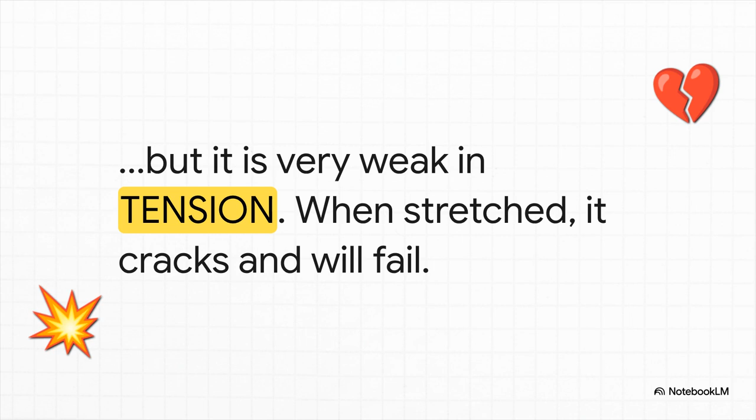That's its strength. But every superhero has a weakness. And for concrete, it's tension. It is just terrible in tension. If you try to pull that same block apart, it'll just snap. So think about a simple beam. When you put a load on it, the top gets squeezed, that's compression, it's happy, but the bottom half gets stretched apart. And that stretching force, that's tension. And that's where unreinforced concrete fails every single time. It cracks from the bottom up. So how do we fix this fundamental flaw?

Well, that brings us right into Section 2, conventional reinforcement. This is the classic solution, and it's a concept you absolutely have to master for your Level I exam. The fix is actually pretty brilliant in its simplicity. We just put steel bars, rebar, right in the areas where that tension is going to happen. For a simple beam, that's usually the bottom. The wet concrete flows around the rebar and hardens, creating this incredible bond. So now when that beam is loaded, the concrete basically hands off those stretching forces to the steel. And steel loves tension. It holds the whole thing together.

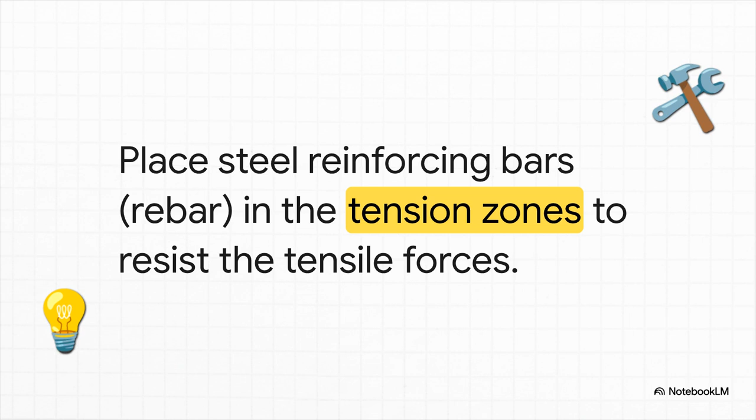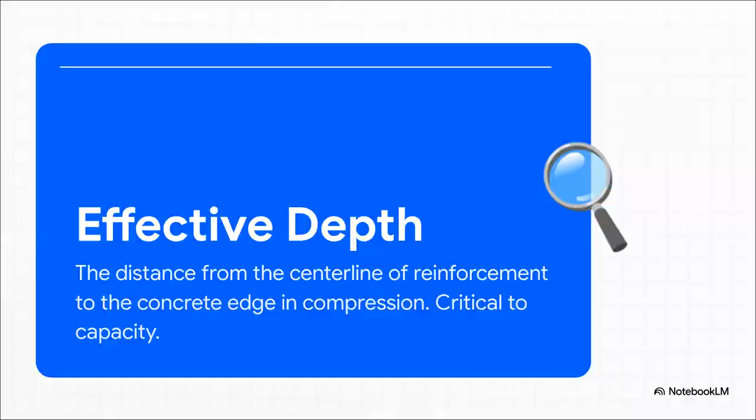Now, here is a term you absolutely positively must know for your exam. Write this down. Effective depth. It's the measurement from the dead center of the rebar all the way to the top edge of the concrete. Why is this so important for you, the inspector? Because this one little dimension has a massive, massive impact on how strong that beam is. If the rebar is placed just a little too high or a little too low, you've changed the effective depth and you could be seriously compromising the member's capacity. It's a huge deal.

Okay, let's get specific about your exam. For all you Level I folks, you need to nail the basics. Why do we need reinforcement? How does regular rebar work? And the hands-on stuff, like checking bar sizes and making sure they're in the right spot according to the drawings. Now, for Level 2, you need all of that, plus the advanced topics you see on the right. Things like pre-stressing, running some basic elongation calculations, and understanding how strands are tensioned.

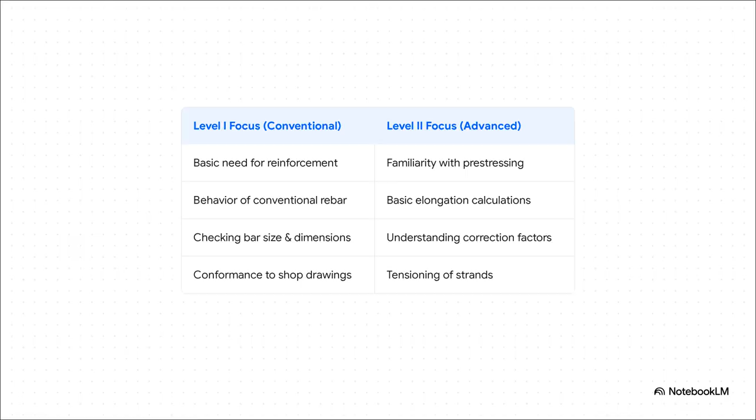Now, conventional rebar is great, but it has one little catch. The concrete actually has to start cracking a tiny bit before the steel really starts doing its job. That brings us to the next level, the power of pre-stressing. This is the proactive approach, and it's a core topic for all you Level 2 candidates. The easiest way to think about this is passive versus active.

Conventional rebar is passive. It just sits there, kind of waiting for a problem, a crack, before it jumps into action. Pre-stressing, on the other hand, is active. It's a preemptive strike. We stretch high-strength steel strands and put the concrete into compression before it ever sees a load. So it's already squeezed together, actively fighting against the tension that's coming later.

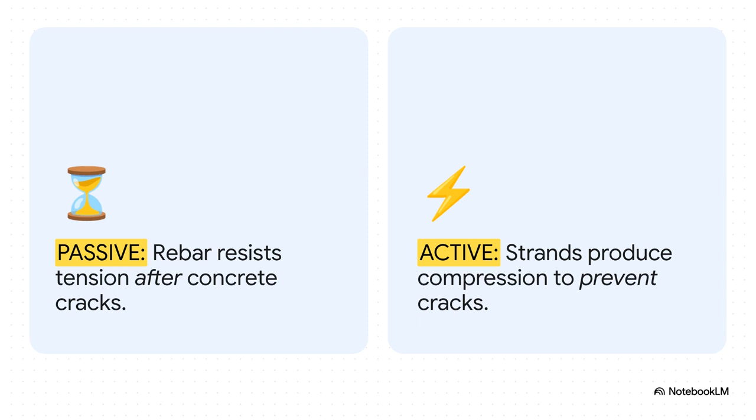This means we can prevent cracks from ever forming in the first place. As an inspector, you're going to see two main types. The most common one in a precast plant is pre-tensioning. That's where the strands are stretched first, like giant guitar strings, and then the concrete is cast around them. Post-tensioning is different. That's where the concrete is cast with hollow tubes inside, and the strands are threaded through and tensioned after the concrete is already hard. Knowing which is totally key to your inspection.

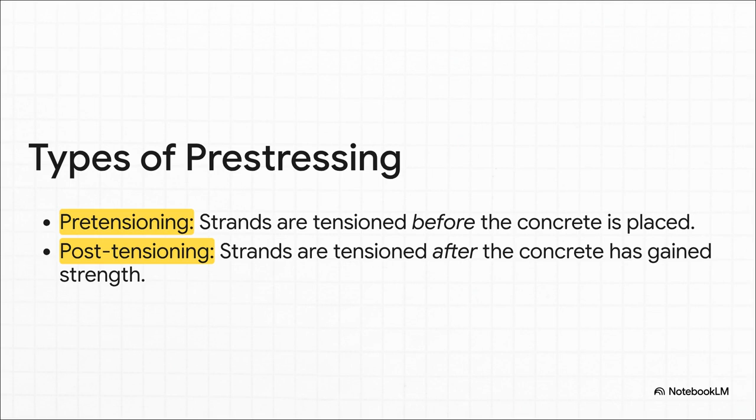Okay, enough theory, let's get down to the nitty-gritty, the stuff you're going to be looking at on the plant floor every single day. Section 4, handling and fabrication rules. This is where big mistakes can happen long before any concrete shows up, and your job is to be the person who catches them. And it all starts with how the steel is stored. This is your first line of defense.

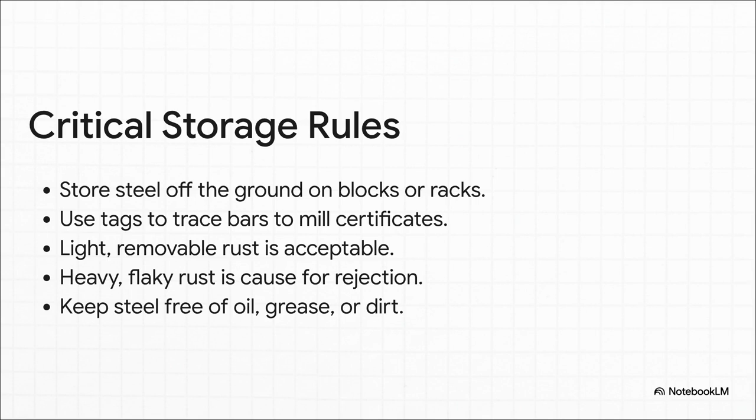First, steel has to be off the ground, on blocks, on racks, I don't care, just not in the dirt. You also need to make sure every bundle is tagged so you can trace it back to its mill certificate. Now let's talk about rust, a super common question. A little bit of light, removable rust that you can wipe off, that's okay. But if you see heavy, scaly rust that's pitting the steel, that's a fail. That's cause for rejection. And of course, keep it clean. No oil, no grease, nothing that's going to mess up the bond with the concrete.

Now, coated bars are special. That coating is their armor against corrosion, so your main job here is to be the guardian of that coating. This means you have to make sure crews are using padded slings or nylon straps to lift them, not standard wire ropes that will just scrape that coating right off. And if you do spot damage, your job is to make sure it gets properly repaired with the approved material before it gets buried in concrete.

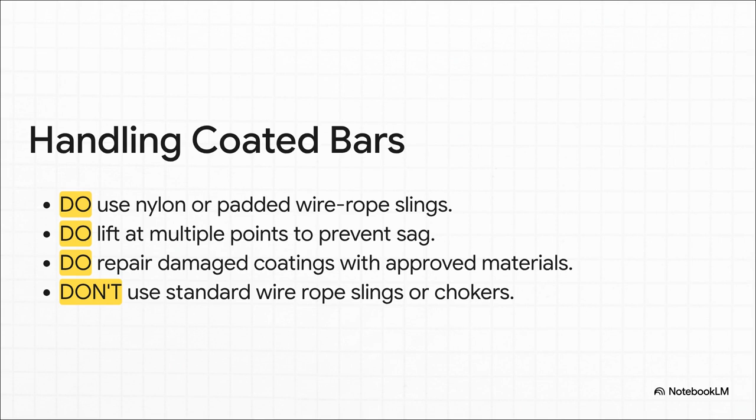When the rebar cages are being built, there are a few key checkpoints. Bending should be done cold, period, unless the engineer has specifically approved heating. And when tying the bars together, the tie wire has to match, coated for coated. But here's the big one, the huge red flag, welding. Any welding on rebar requires specific approval from the engineer. And this is a safety rule you must enforce. You never, ever allow welding anywhere near those high-strength prestressing strands.

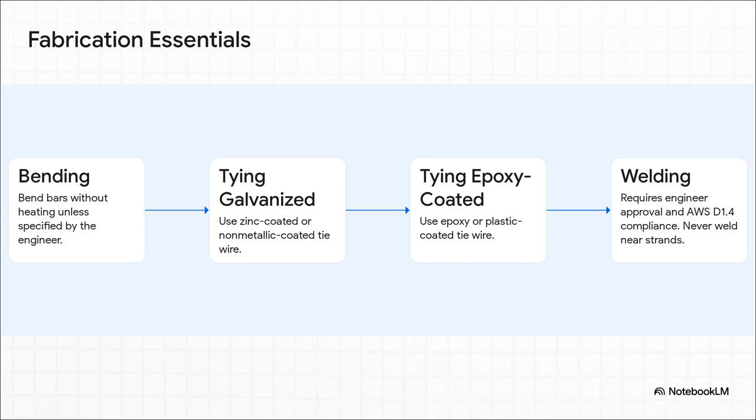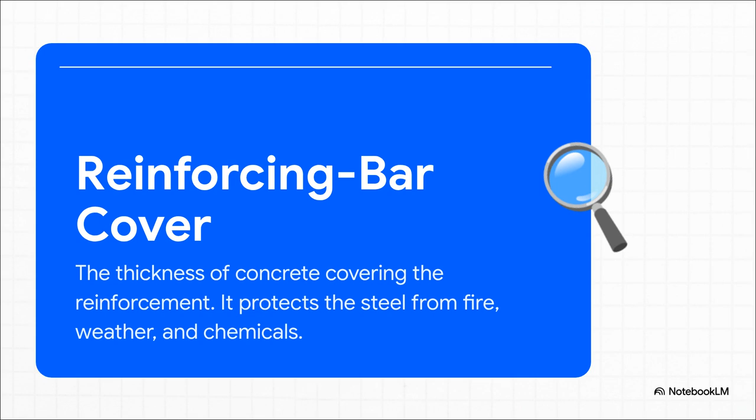All right, this brings us to the final section, and honestly, maybe the most important part of your day-to-day job, installation and inspection. This is the final check. This is your last chance to make sure everything is perfect before it's literally set in stone. Here is another vocab word for your exam that is at the center of your universe. Reinforcing bar cover. It's simple. It's just the amount of concrete between the rebar and the outside world. This isn't just for looks. This layer of concrete is what protects the steel from weather, from chemicals, from fire. It's its shield.

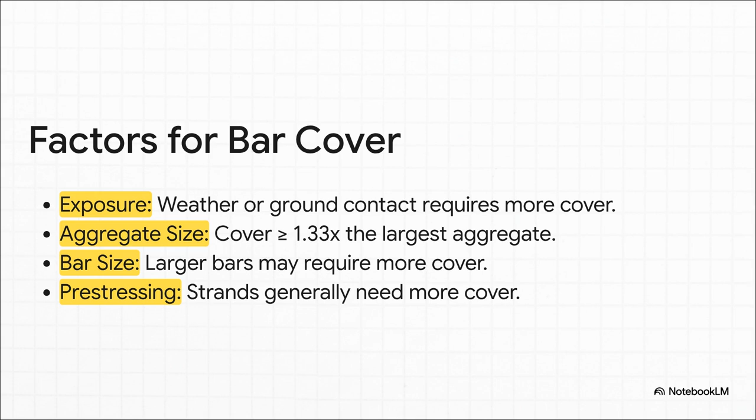So how much cover do you need? Well, it's not a random number. The engineer figures it out based on things like where the piece will be used or how big the aggregate is. Now, good news, your job isn't to calculate it. Your job is to take the shop drawings, look at the number, then grab a ruler and physically verify that the rebar in the form has the right amount of cover within the allowed tolerances.

And that brings us to what I like to call the golden rule of being a PCI inspector. Just soak this quote in. If a bar doesn't fit, if something's in the way, you don't cut it. The crew doesn't cut it, nobody touches it. Any change, no matter how small it seems, has to have written approval from engineering. End of story. This is absolutely non-negotiable.

So there you have it. We've gone through the what, the why, and the how that you'll need for your exam. But I want to leave you with one last thing to think about. This isn't just about passing a test or memorizing rules. It's about understanding what happens in the real world if these rules get ignored.

A bar in the wrong place, a damaged coating, a little unauthorized cut. These aren't just minor mistakes. They can affect the safety and the lifespan of a bridge, a building, a parking garage. That's the real weight of your job. And that's why what you know and what you do is so incredibly vital.